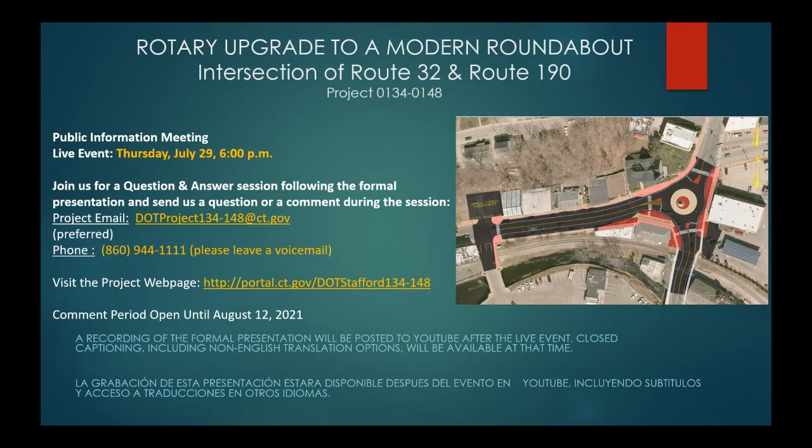Welcome to the virtual public informational meeting for state project number 134148. My name is Mike Cherpak and I serve as the design project manager for this proposal.

I hope everyone is staying healthy and staying safe. We appreciate your willingness and flexibility to attend this meeting in this venue. The goals of tonight's meeting are as follows.

First, I'll introduce you to the design team, including front office leadership and designers. Next, I'd like to go over the virtual platform and how you'll be able to interact with the design team, ask questions, and get answers.

The designers will provide a formal presentation that'll provide some background on the project location, define what the purpose and need of the project is, and go over the design plans. These plans are only about 30% complete, and your input at tonight's meeting will shape how this project progresses.

Lastly, we will have a live question and answer session. More on how this will work later. I mentioned earlier introducing the project team. We've been regularly communicating with the town of Stafford, including First Selectman Mary Mitta. So before we go any further, I'd like to allow First Selectman Mitta to say a few words.

Good evening, everyone, and thanks for attending this informational meeting regarding the modern roundabout being designed and constructed by the State of Connecticut Department of Transportation. This will be in front of the Warren Memorial Town Hall, which is at the intersection of Route 190 and Route 32, which is our main street.

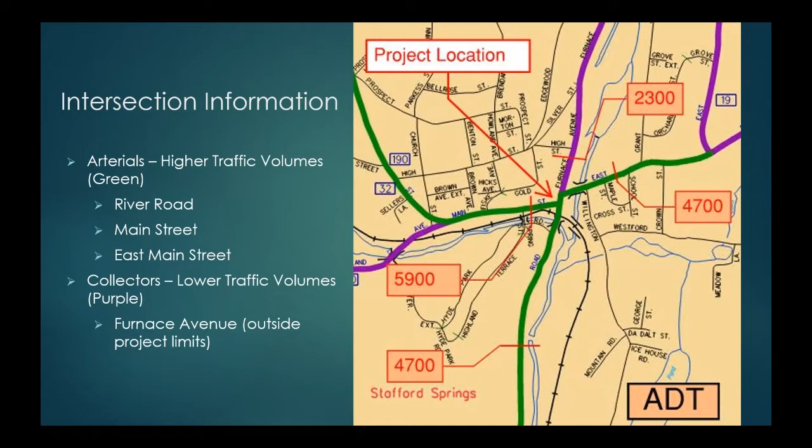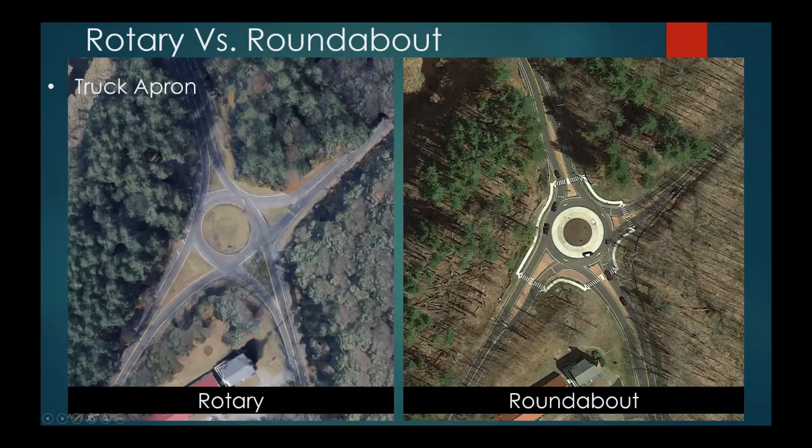Next, you probably noticed the pedestrian accommodations, including sidewalks, crosswalks, and refuge areas located within the splitter islands. Speaking of the splitter islands, their purpose is to provide channelization and traffic calming into the circulatory roadway.

The rotary configuration isn't doing much for the driver, but the raised splitter islands of the roundabout and 6-inch curbing provide the necessary geometry to channelize and decelerate vehicles on approach, setting up one of the most important factors: deflection. The fastest path through both intersections in most cases is the through movement.

The rotary configuration does not offer much in the way of deflection and is very much a straight shot through, allowing for dangerously high speeds. Should the south-north driver fail to yield to the west-east driver, a crash here could be fatal, and this was one of the main reasons for modernizing this rotary.

The modern roundabout, however, has reverse curves, which force drivers to decelerate and proceed through the intersection at a slower, more controlled speed. If we compare the two movements, we can see there are only 2 curves in the rotary, and 5 curves in the roundabout.

Additionally, drivers in the roundabout approach closer to the center of the circle, while in the rotary they approach more from the side, again allowing those high speeds.

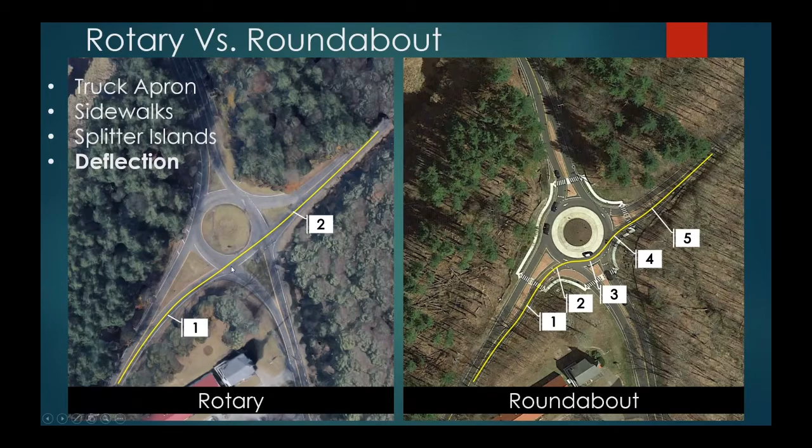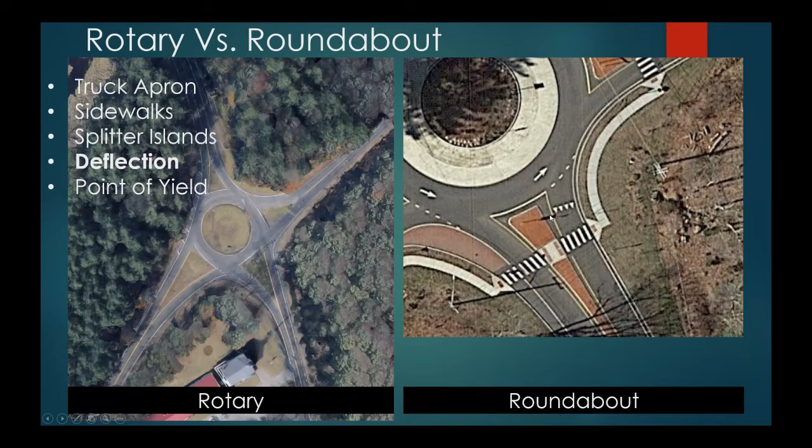Lastly, drivers on the approach legs of the roundabout yield to drivers in the circulatory roadway. The dashed lines illustrate the separation between the approach leg and the circulatory roadway. Though this is true in both intersections, the roundabout's point of yield is more apparent and further illustrates where vehicles are required to yield. From the driver's perspective, we can see how the yield signs are placed at the same point as the pavement markings.

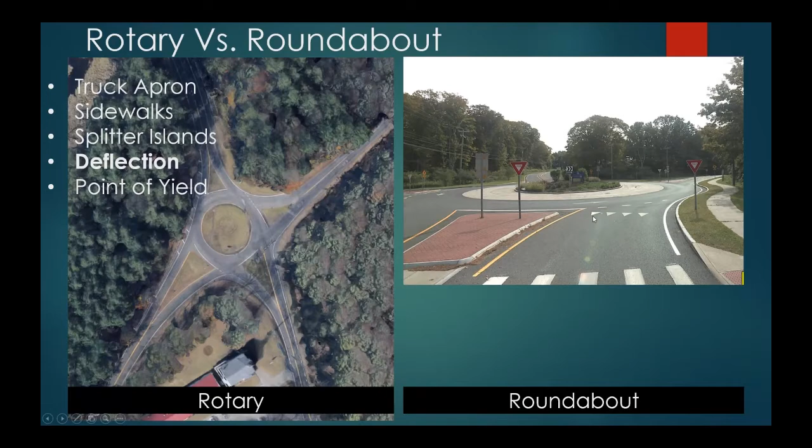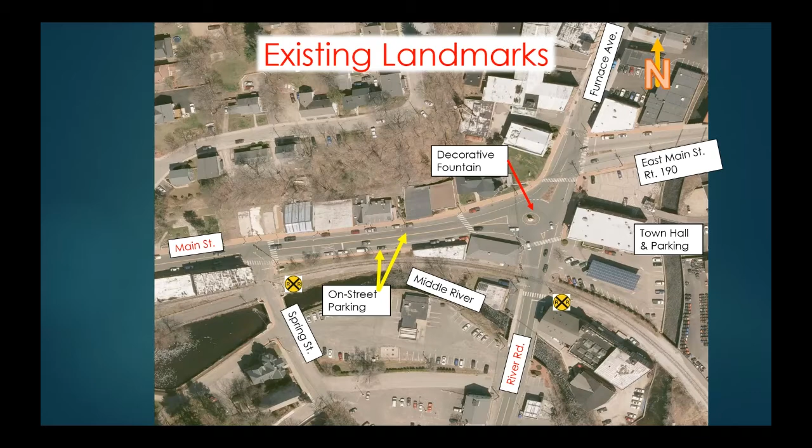Coming back to the Stafford roundabout, we'll look at the issues of this rotary configuration one leg at a time. However, we should keep in mind that the example we just looked at was in a high-speed rural environment, where our location is in a low-speed urban environment. Though the goals are the same, the treatments are different, as roundabout design is not a one-size-fits-all solution.

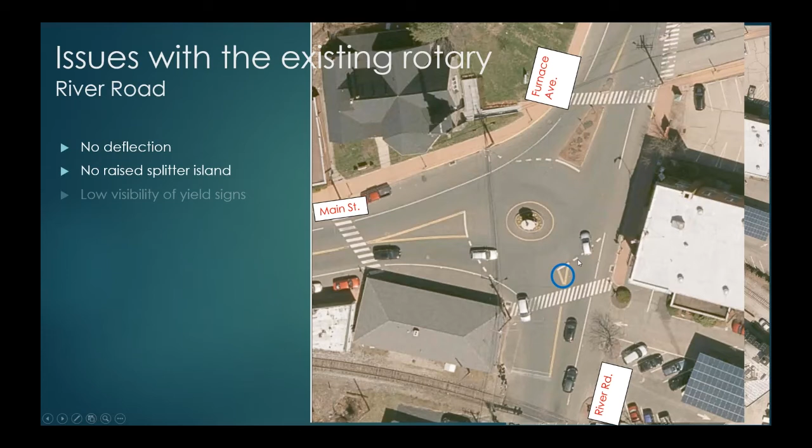Starting on River Road, we can immediately see that there is no deflection on this approach. It is very much a straight-through movement. Taking a closer look, there is no splitter island present to guide users into the circulatory roadway. The location of the white dashed line with respect to the location of the yield signs decreases the sign's visibility and effectiveness.

This creates driver confusion. A driver approaching on River Road may fail to yield due to the low visibility of the sign, or a driver already in the circulatory roadway may unexpectedly stop in the roundabout, assuming the entering driver will not yield, possibly causing a rear-end crash.

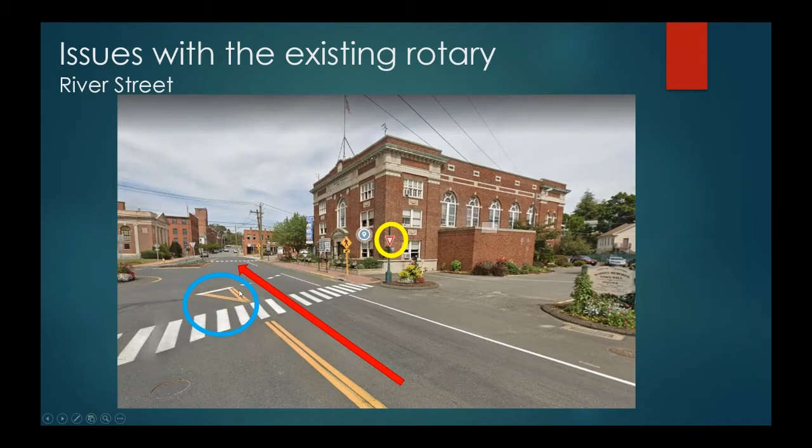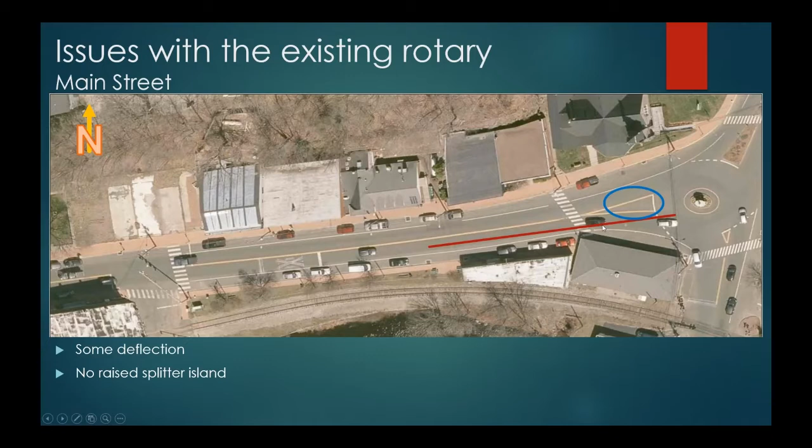On Main Street, we have some slight deflection. However, only a painted splitter island is present, and the location of the yield sign is in front of the police building, almost 50 feet from the actual point of yield. Lastly, the lack of channelization has created a conflict with the roof of the police building, and less experienced drivers of large commercial vehicles have actually struck the roof.

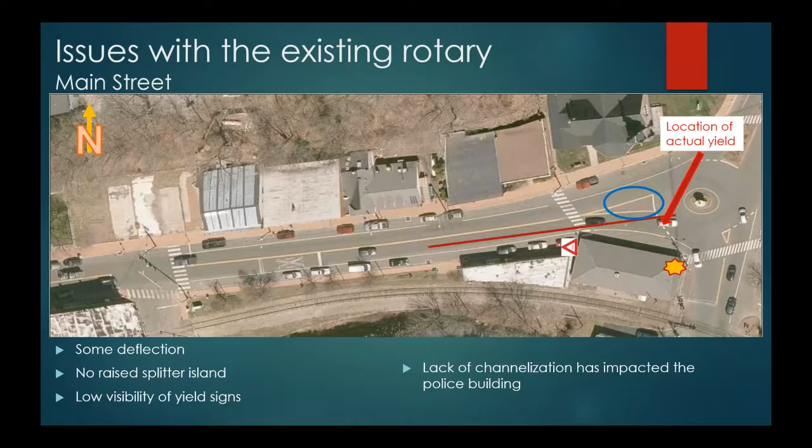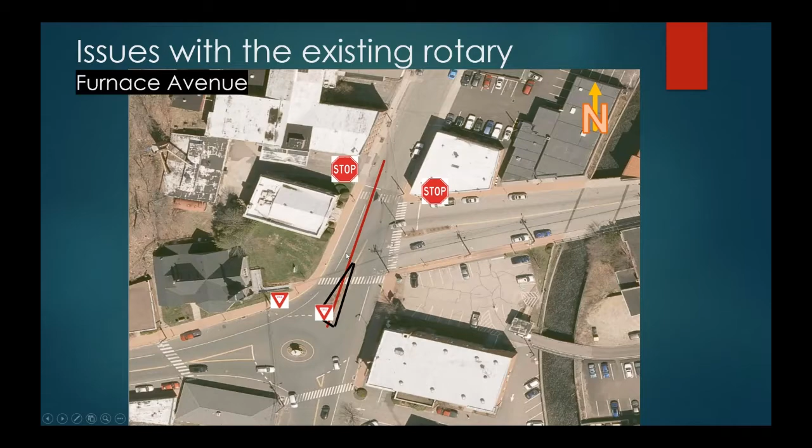Lastly, let's look at the approach from East Main Street and Furnace Avenue. This approach is better than the other two legs of the intersection. A small splitter island is present, yield signs are in the proper location, and the deflection isn't too bad either, but there's still room for improvement.

A look at the crash history in our project limits revealed that there were 30 crashes and 2 injuries which occurred over a 3-year period. 5 were angle crashes or T-bones, 10 side swipes, 14 rear ends, and 1 pedestrian was struck by a vehicle crossing Main Street.

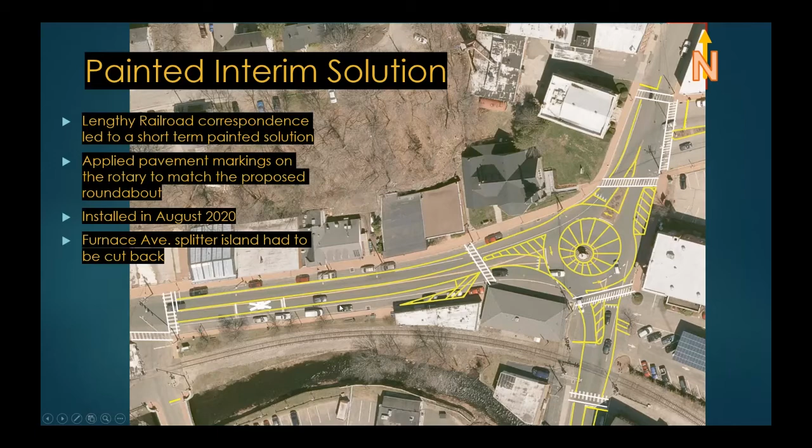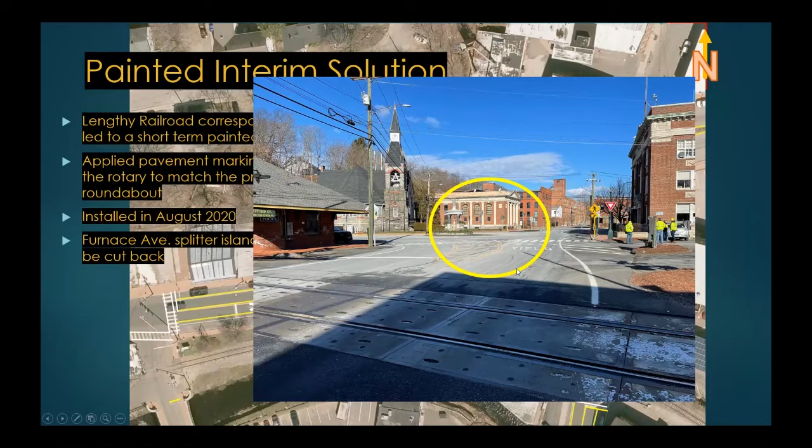I mentioned before that there were 2 rail crossings present in the project limits, and we will be upgrading the railroad warning devices at River Road with our project. However, since coordination with railroad entities is a lengthy process and our preliminary roadway design was nearly complete, the department saw the opportunity to provide line striping as an immediate temporary solution to the deficiencies of the rotary. This was installed in August of 2020, and it allowed us in design to see how well roundabout geometry would perform, or if there were any changes to consider for a more permanent solution.

In our initial assessments, the line striping performs well, but the issue of driver compliance with the line striping still remains. It's easy to drive over a painted line instead of a curb. Therefore, there's still need for a more permanent solution.

I will now turn the presentation over to the project's designer to discuss what we are proposing.

Thank you for the introduction, Nick. My name is Hasib Ahmed, and I am the project designer. I will take you through some of the changes that we are proposing.

With the combination of the horizontal curves, the splitter island, and the truck apron, we're able to slow vehicles down as they approach the roundabout. If you remember from existing conditions, it was a straight line from River Road to Furnace Avenue, but with this combination, it's not as much of a straight line anymore.

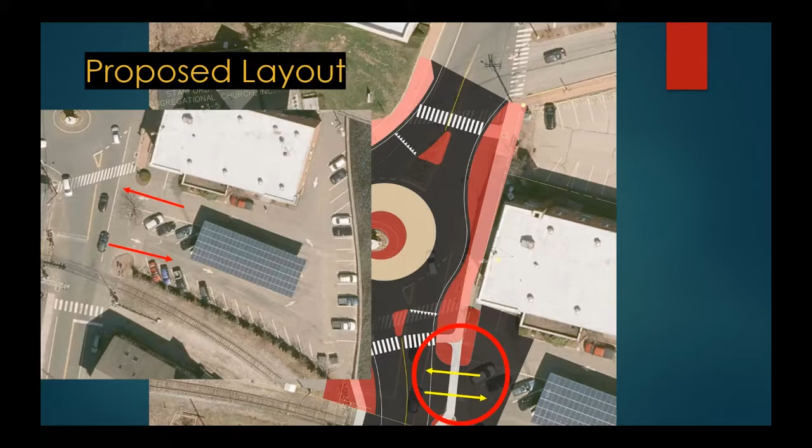Some additional changes include adding a channelization island in front of the police building. This helps in four ways. First, it enforces the horizontal curve on Main Street and helps people slow down as they approach the roundabout. Second, it gives police a parking area in front of the building. A portion of the island will be mountable to allow police vehicles to exit without waiting in a queue.

Third, the island gives us a proper location to install a yield sign. Previously, the yield sign was located much further back, but now with the island, it can be placed near the yield point. Finally, the island pushes vehicles and trucks away from the police building, which should prevent the roof from getting hit by trucks.

We are also proposing to install a parking lot at this location. We are proposing to extend a few curb lines to help improve the geometry of the roundabout. The parking lot is being installed to help mitigate parking loss, with approximately 11 parking spots fitting in this location.

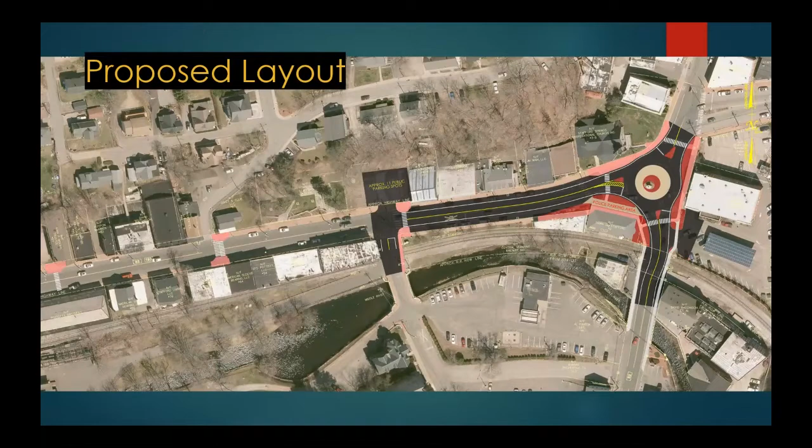This is a larger color plan that shows some more changes. We will be adding bump outs on Main Street, which I'll go over in greater detail shortly. We are extending the curb line at these locations, which enforces the geometry of the roundabout and pushes vehicles away from pedestrians, also giving pedestrians more room to walk around.

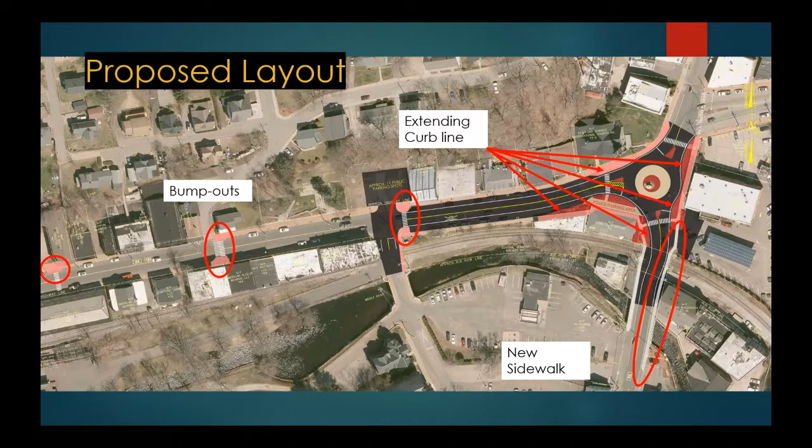Lastly, we are connecting the sidewalk from the town hall to the gas station just south of the bridge. We will be retrofitting the existing bridge with new sidewalk.

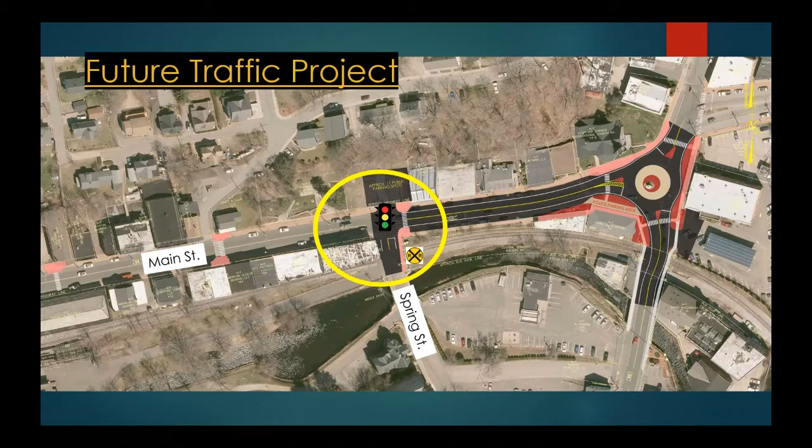I wanted to mention there is a separate project in design to upgrade the railroad crossing equipment at Spring Street. They are also looking at replacing the existing flashing beacon with a full signal as an alternative. This full signal alternative has been analyzed and will not have any impact on the roundabout operations. The state will coordinate with the town as this separate project moves through the design phase.

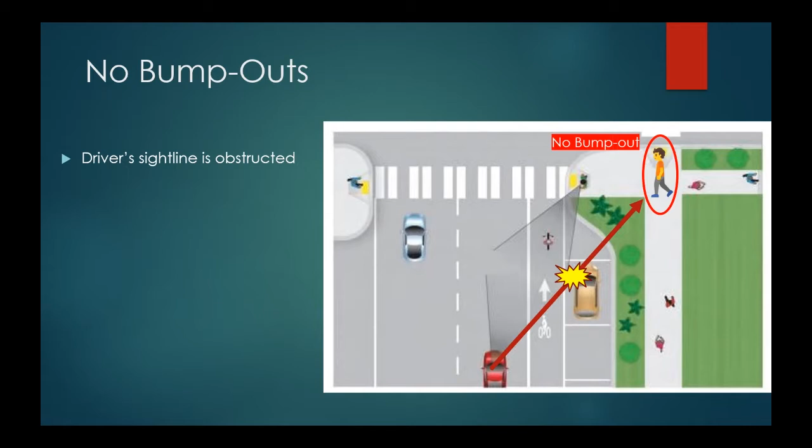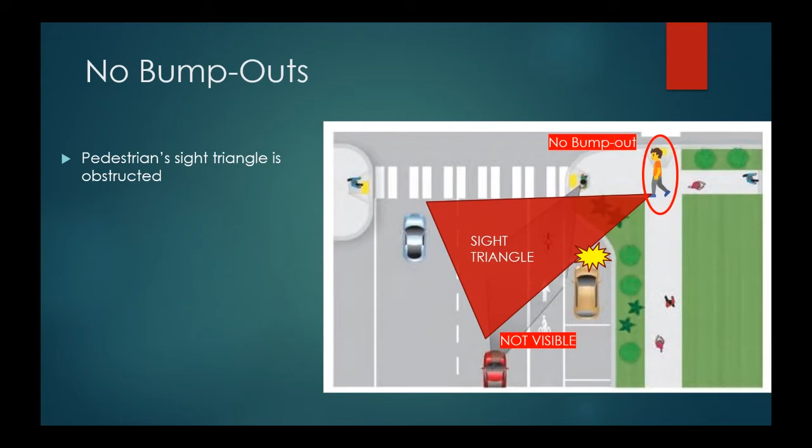The pedestrian will also have a difficult time seeing oncoming cars because the pedestrian sight triangle is obstructed by the parked cars. It is very difficult to see behind the cars at that angle. Without bump outs, the pedestrian would have a longer crossing distance, which also means the driver would have a longer wait time.

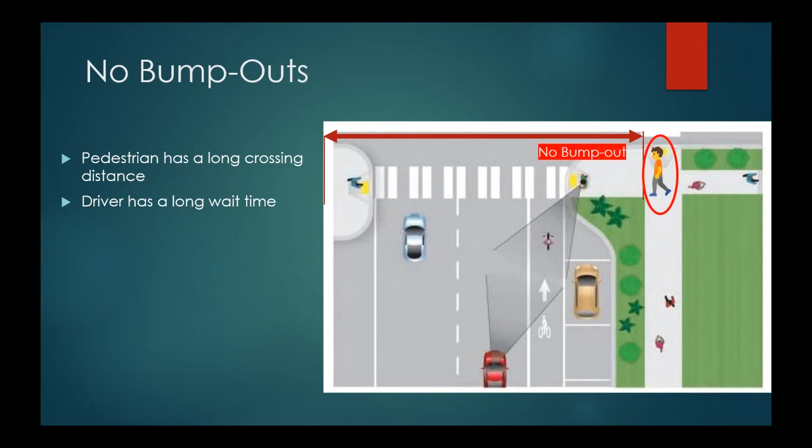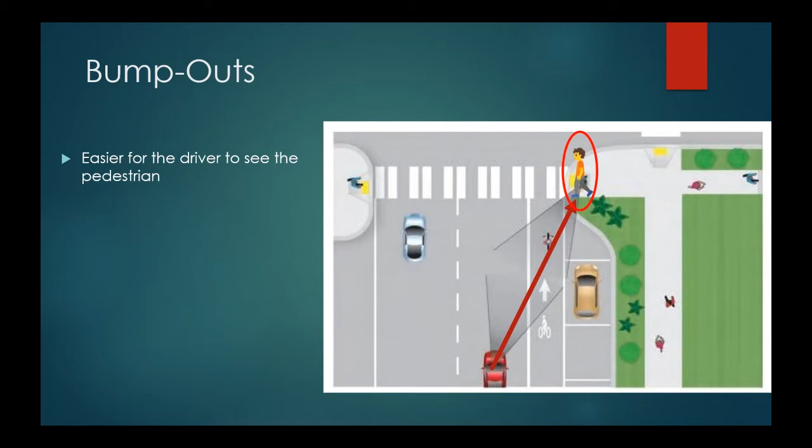Once bump outs are installed, the pedestrian is much closer to the travel lane, making it easier for drivers to see pedestrians since parked cars no longer obstruct the view. It is also much easier for the pedestrian to see the roadway, and this increase in roadway visibility makes the pedestrian feel more safe.

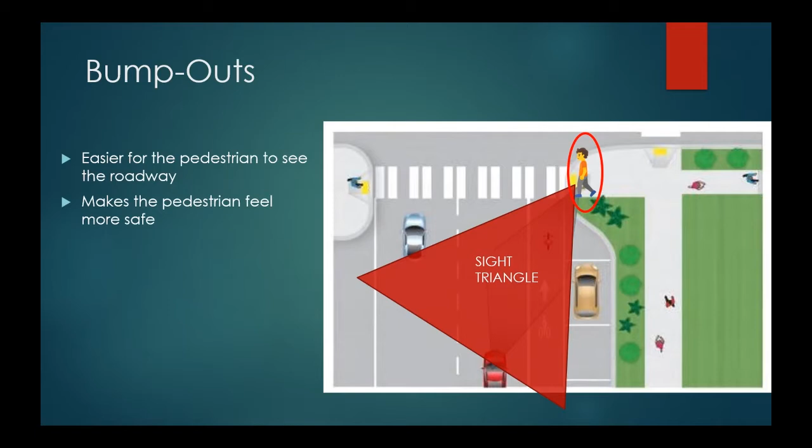With the installation of the bump outs, the crossing distance becomes shorter. This also helps the driver because now there is a shorter waiting time.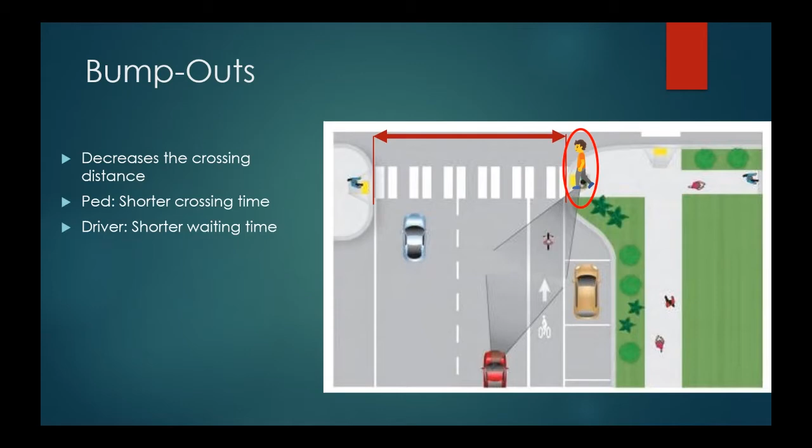Now I'll talk about the typical sections used for this project. First, let me explain what a typical section is: it's when we take a slice out of the roadway structure and examine it as if we were standing in front of the slice. These sections help us design roadway elements such as shoulders, travel lanes, and curbing, and also help us see where the stormwater is draining.

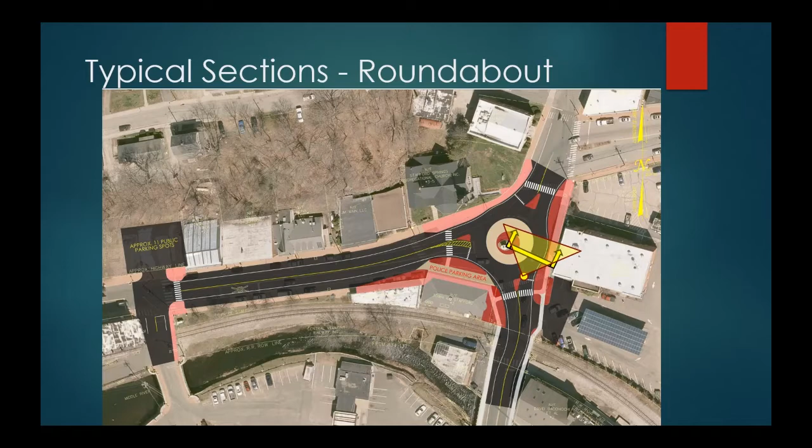The first section we will look at is the typical section for the roundabout. We will be taking a slice out of the roundabout where the yellow line is, viewing it as if we were looking north. Here you can see the typical section for the roundabout: we are proposing a 12 to 18 foot truck apron, followed by an 18-foot travel lane and a 2-foot shoulder.

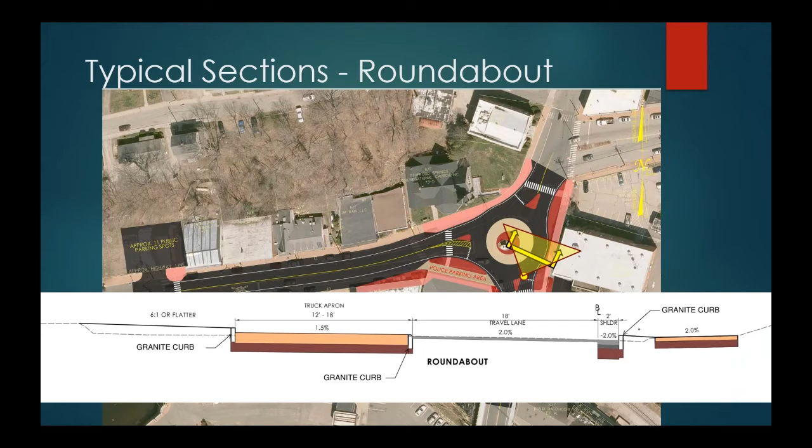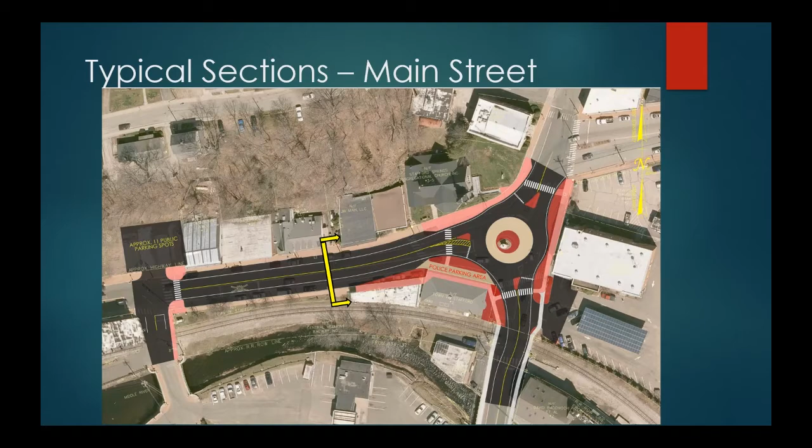For Main Street, we will be slicing the roadway here, looking as if we were looking east. The typical section for Main Street has 9 feet of on-street parking, followed by two 12-foot travel lanes, and 10 feet of on-street parking on the right side.

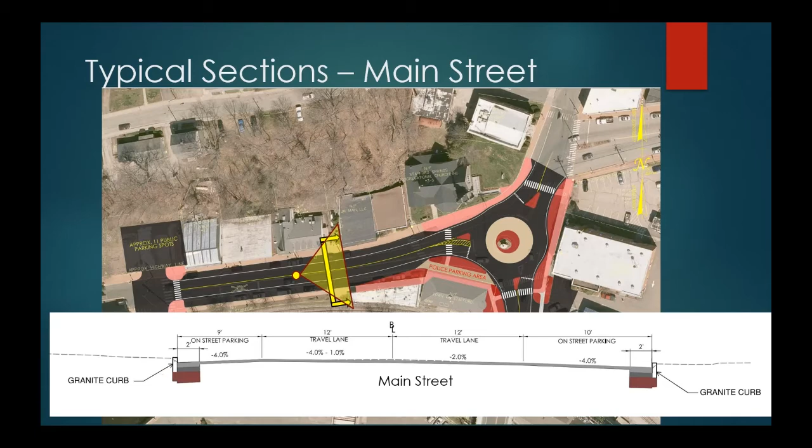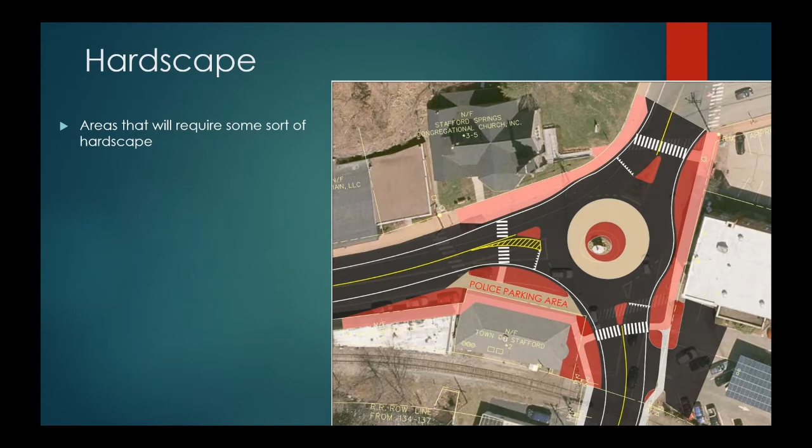As mentioned previously, we will be extending the curb line to create a better geometry for the roundabout. These are the areas that will require some sort of hardscape. We are proposing to use stamped concrete, and the new stamped concrete should match the pattern and color used in the existing hardscaped areas.

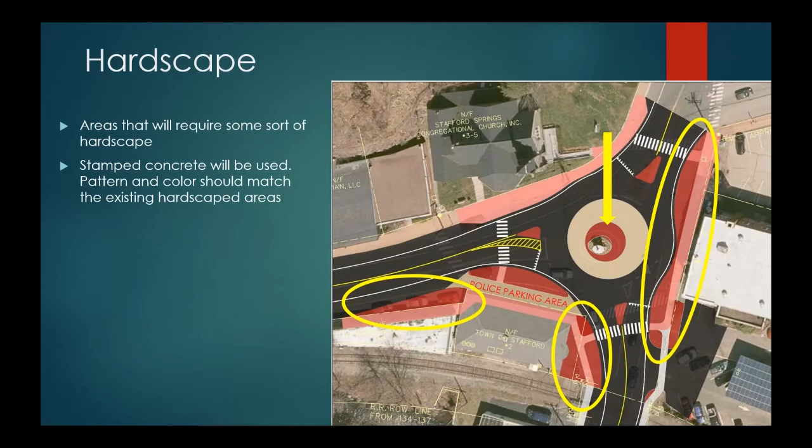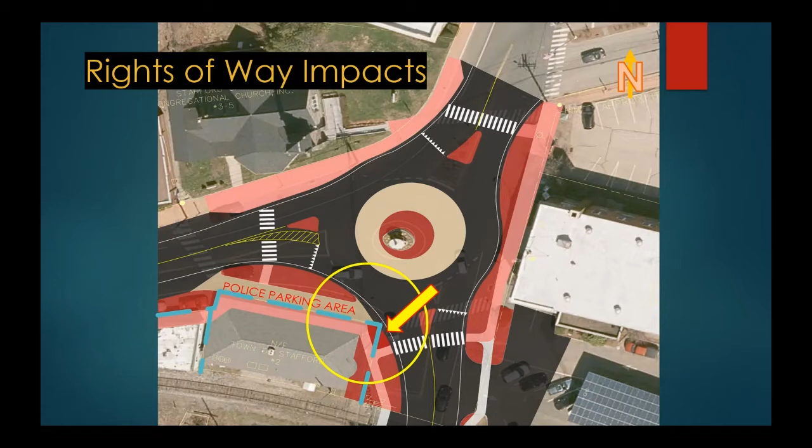Rights-of-way coordination will continue for this project, and we are still evaluating the rights-of-way impacts. This is an example of one minor impact. Here we have the property line for the police station highlighted as the blue dashed line, and you can see a small portion of the curbing is crossing over the property line. Much of the project is being built within the existing footprint of the intersection, so we do not expect any significant acquisitions.

Dennis McDonald is here from our rights-of-way office, and he will explain the rights-of-way process.

Good evening, everyone. My name is Dennis McDonald, and I'm a representative from the Connecticut Department of Transportation, Division of Rights-of-Way. I'll provide a brief overview of the right-of-way process. The function of the Division of Rights-of-Way is to acquire all property and property rights necessary for the project. This is done in accordance with Connecticut General Statute Section 13A-73, 13a-98e, and the Uniform Relocation Assistance and Real Property Acquisition Policies Act of 1970, as amended.

Your typical right-of-way impacts include partial acquisitions, easements, and rights. Impacts are subject to change as the design progresses, but this gives a general idea of typical property impacts.

Once property impacts have been established, each impacted property owner will receive a letter of intent to acquire along with a property acquisition map. The letter essentially initiates the right-of-way process, and the map provides a detailed overview of the specific right-of-way impacts. Soon after the letter is received, an evaluation process will take place, and once a value has been established, each impacted property owner will receive a written offer of compensation.

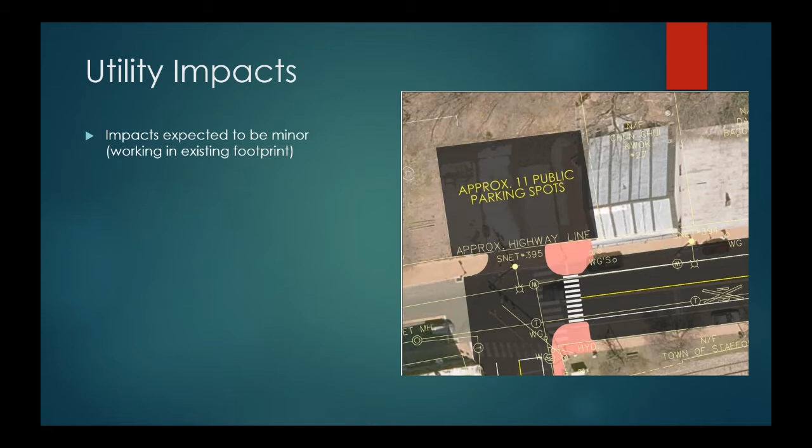Thank you, Dennis. Next, I'll talk about some of the utility impacts. As mentioned earlier, we are working within the existing footprint, so we expect the utility impacts to be minor. One example of a minor utility impact is a utility pole in the proposed parking lot driveway. If the utilities cannot be avoided, they will have to be relocated. We are coordinating with our utilities office to see how to best manage these conflicts.

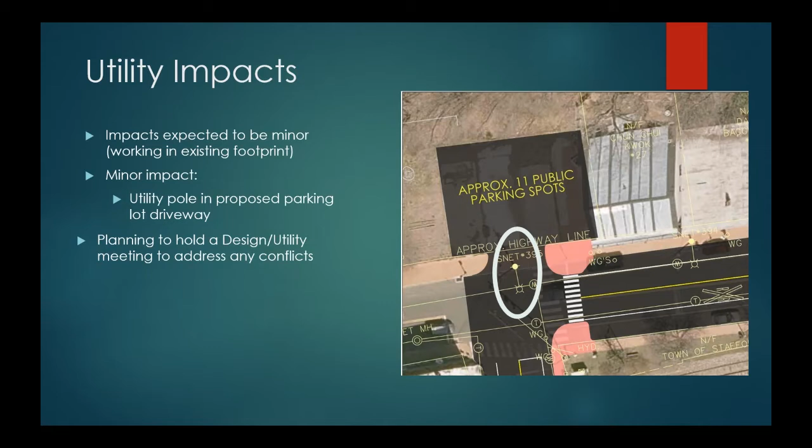Now I'll take a few seconds and talk about the project construction. We anticipate that construction will start in the spring of 2023 and be completed by the fall of the same year. The contractor will be required to maintain and protect traffic during construction, and to provide business and pedestrian access. Occasional night work may be required to reconstruct the roadway. We do not expect any roadway closures; the intersection should be operational throughout construction.

The construction staging plans will be completed in the final design phase of the project.

That is the end of my presentation. I'll turn it back over to Mike. Thank you for your time.

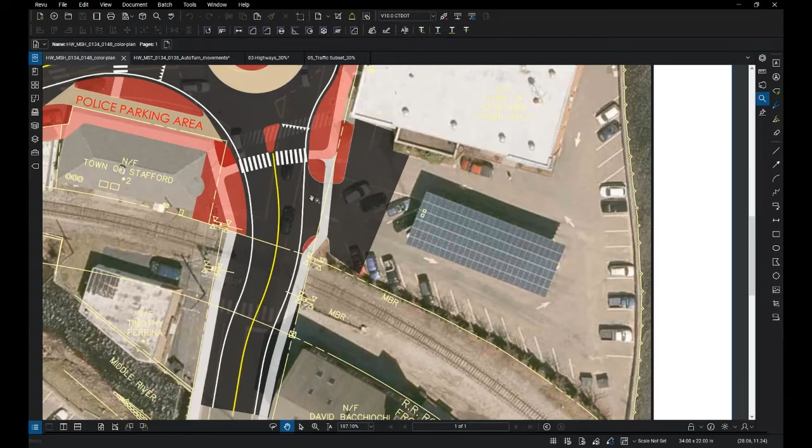In terms of circulating around the town hall's parking lot, it's going to be the same as it is today. A couple of parking spots in this area will be affected. You would still make a right or left turn into this parking area, circulate in the same direction as these arrows, and come back out the same way you came in. The only difference is that the island that was present before is now occupied by this space, where we're moving the driveway entrance to make room for the crosswalk at this location.

One of the things we needed to do is provide an area far enough away from that circulatory roadway where we could cross pedestrians. There's a lot of pedestrian activity out here, with people going to the town hall, the police station, and the shops up and down Main Street. So pedestrian crossing and activity was one of our major points of interest for the design team. Thanks, Nick, for bringing it up.

There's another question: is it possible to find parking off Main Street? I fear that paving the vacant lot for a parking lot misses a great opportunity to create more climate-friendly green space downtown that would attract people.

That's a great question. One of the things we talked about with the town, and something the town explicitly brought up, was the loss of parking being a major problem. Our showing of the 11 public parking spots that could be created by that lot was really just an idea to mitigate against that loss.

We knew we needed to adjust curb lines and take parking out of the circulatory roadway and the roundabout, because it's just not operationally good, and we'd be losing spaces in those areas. So we looked at that vacant town-owned lot as a potential mitigation for it. That doesn't mean we have to do that — there could be other ways to go about this.

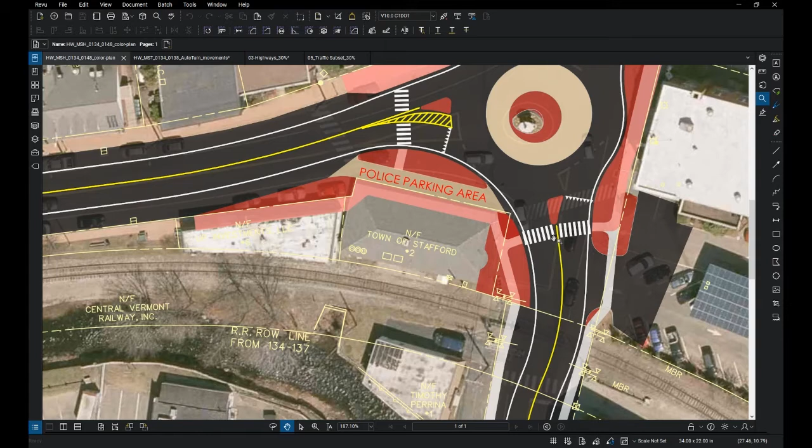We're going to extend the sidewalk down a little further, closer to where the parking lot is, and we're going to put the crosswalk across River Road here, locating it at the best position for the roundabout and moving it prior to the yield point for drivers. But the sidewalk in this location will be replaced in kind, and pedestrians will still have this space to move around. Thank you for your question.

And Nick, while we're on that conversation, what can you show us as you move south down Route 32, that sidewalk there, it was kind of hard to see in the presentation. Can you just show people where we're extending sidewalk and where we have existing sidewalk out there?

Yep. So the sidewalk didn't exist on this side of the bridge currently. There was a request from the town that if we could retrofit the bridge with the sidewalk, and we coordinated with our bridge engineers. We found that the bridge itself was structurally able to support a sidewalk at this location. There are some locations where there'll be a raised sidewalk on top of some 6-inch curbing. This would be closer to the bridge. And there's other areas where the sidewalk would almost be flush with the pavement, and that's to accommodate some of the driveways that are in this area.

There was a desire to bring it all the way down towards the gas station or former gas station at this location, so this is where we brought it to. The other sidewalk on the opposite side of the road looked like it was in somewhat rough condition, so we were upgrading this as well and resurfacing it.

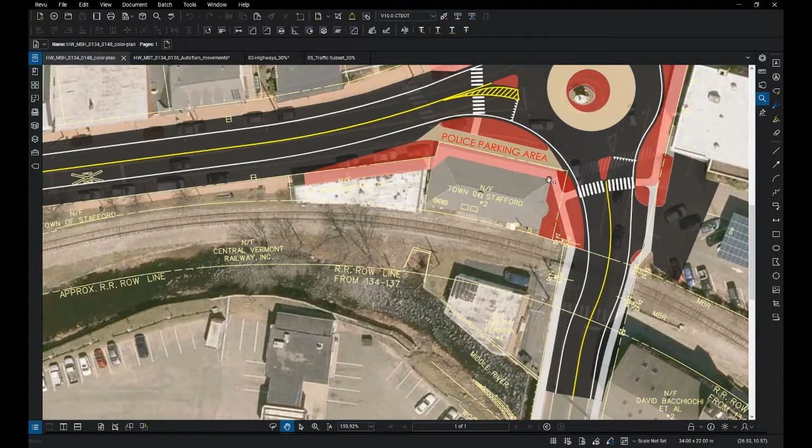Yep, that's right, Nick. And we'll be providing connections to these sidewalks on both sides, in front of the police station and around, similar to how they are today.

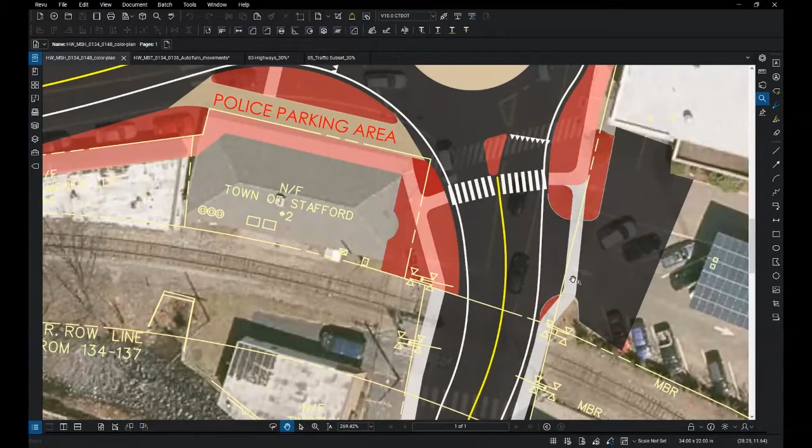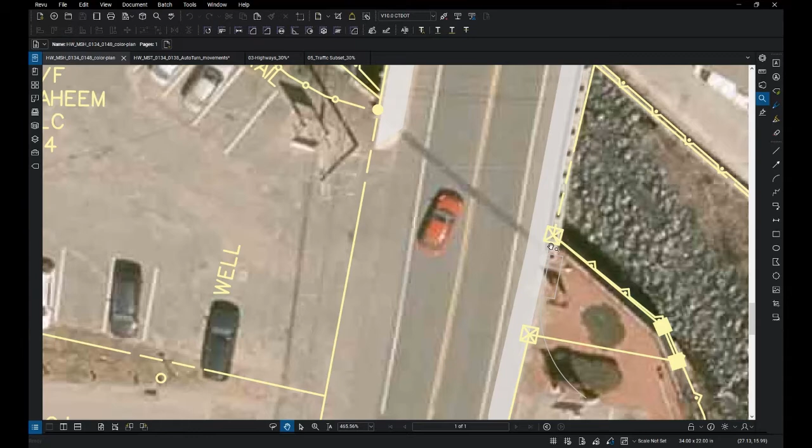So Nick, there's a question about how many property owners will potentially be affected by right-of-way acquisitions for this project. Not many, right? No, our rights-of-way involvement on this project is very minimal. The only potential acquisitions would be a small sliver that's needed to accommodate the curb line at this location. We're working with the town on that. There's some locations over here where the sidewalk crosses over the right-of-way line. We're coordinating with the town, and possibly an easement to put an impact attenuator or some type of railing device in front of this area, just to protect the bridge abutment. These are still details that we're working out.

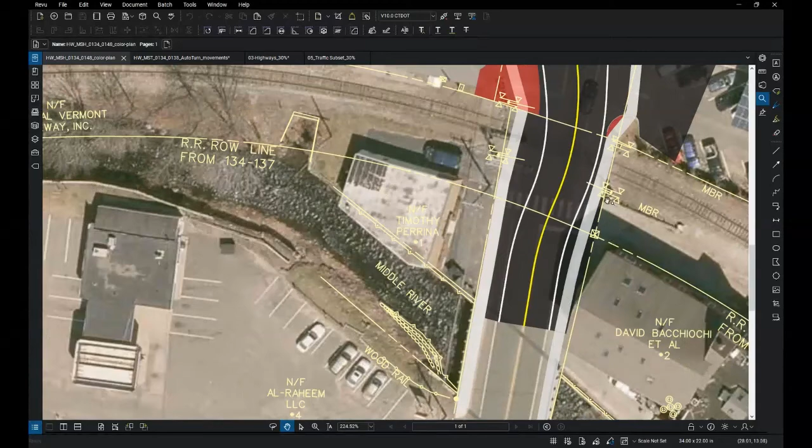But in terms of all other properties in this area, sidewalk amendments would most likely be done as rights, and we would coordinate with those property owners, but there wouldn't be any easements for this work.

Nick, you still there? No, we may have lost Nick. Okay, so like Nick was saying, I do not believe there's very many, if any, rights-of-way impacts. So hang on while we address some technical difficulties.

Okay, so there's a question about why do we need new sidewalk from City Hall to the gas station? The gas station's been closed for 2 years. What we'd like to do is provide sidewalk connections the best that we can. That property could be developed at another time. And so under our project, we feel we can provide those sidewalk connections at a relatively low cost. It's probably the best time to do it now. So we're going to do that.

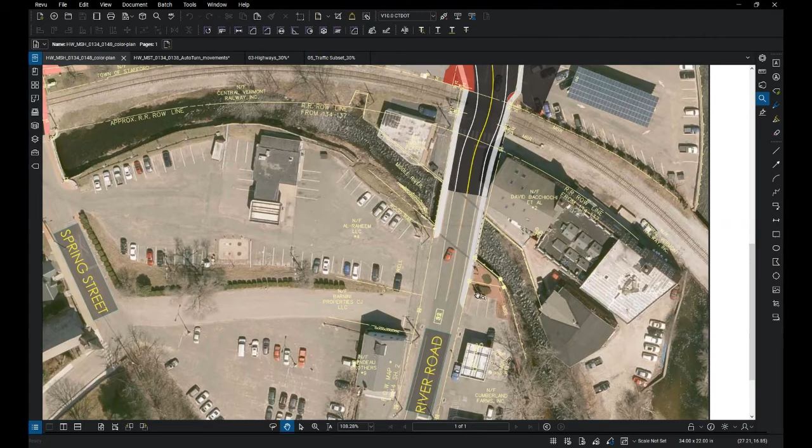There's a question that says, you mentioned an analysis of a full traffic light that you wish to install. You say it will not adversely affect the flow of traffic through the rotary. Could you please discuss this? Yep. So with us today we have Mike Chachakis. He's one of the traffic engineers responsible for looking at that. What it comes down to is it's a project that would potentially replace the existing traffic rail crossing equipment, which he'll tell you is out of date and in dire need of an upgrade. One of the options they're looking at is a full actuated signal, and that signal would be under a separate project. We wanted to make sure the roundabout would work with either the existing signal equipment or any proposed signal equipment, and Mike will tell you it does work with both scenarios.

And Mike, are you able to unmute and talk? Hey Mike. Yeah, I can talk for a little bit about the potential signal we may be putting in there separately. So if we do the signal, we don't want it to affect the roundabout, obviously, because backups into the roundabout can lock it up pretty quickly.

So looking at that signal, we looked at future volumes. We went out to 2040 projected volumes to see what would happen. Because it's a fully actuated signal, it'll rest in green on Main Street until someone from Spring Street, or from a parking lot there, calls in their phase and changes the signal on Main Street to red to give themselves the green light. We wanted to make sure that when that happens, there wouldn't be any kind of backups into the roundabout. So from what we've found, our 95th percentile queues show that it won't affect the roundabout.

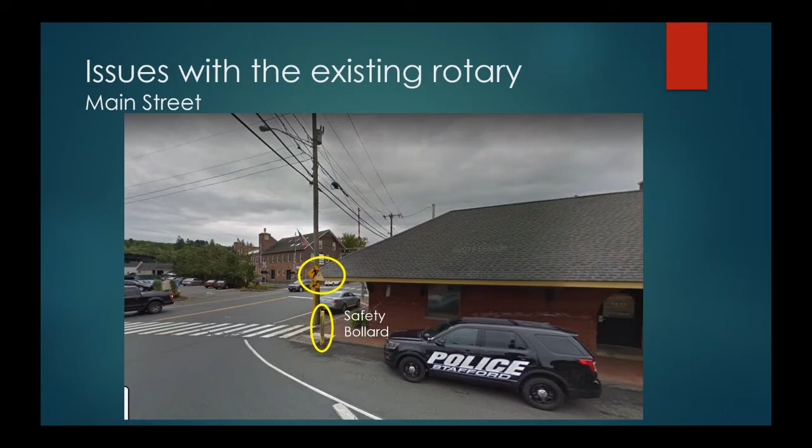There's a question here, and I think we just need to close the loop again. The bump-outs would require town snow removal, consistent with the existing patterns out there now. The town removes snow from the parking areas and the sidewalks, and the town indicated they would continue to do that after a snowstorm.

Mandy asks, will there be a garden area that surrounds the fountain, or will that all be concrete truck apron? Let's bring up the plan again.

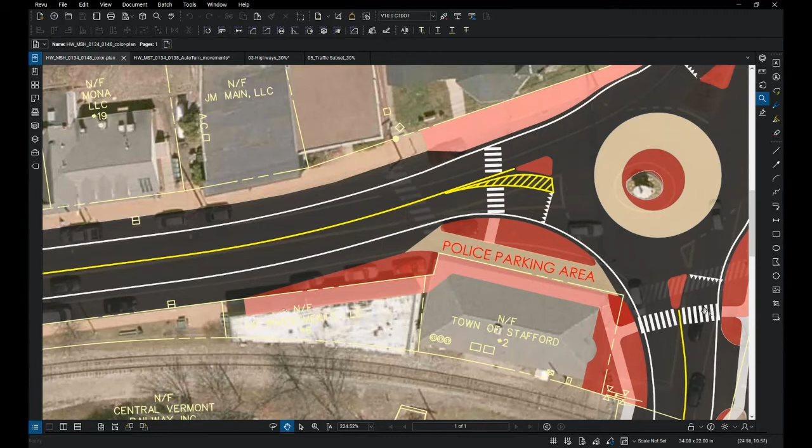We have a phone call, a voicemail from a business owner concerned about right-of-way conflicts and how it will affect parking where it's already restricted. Right now, the only right-of-way acquisition we believe we have is to clean up - I wouldn't even call it a right-of-way acquisition. It's more cleaning up a deficiency where we have roadway pavement on Town of Stafford property, so it's more of a technicality. Everywhere else in the project limits, we don't believe there's much right-of-way involvement. We may ask property owners for a right to construct or reconstruct a sidewalk on their property, but that's just to clean things up and make sure the whole community looks like a complete project when everyone's done.

Will it affect your parking? I'd have to know exactly where your business and parking are. But I'd urge you, if you left your contact information in the voicemail, myself or someone from my team can get back to you, and we can even meet you in the field to explain where curb lines are going to be pushed out. For the most part, between Spring Street and the roundabout, the parking situation will remain the same, with the exception of immediately in front of the church and immediately in front of the town hall. I'm not even certain those are legal parking spaces in front of the town hall. But those are areas where the curb lines have been adjusted, in the immediate area of the roundabout. Everywhere else, they're almost in the exact same location, if not the same.

There was a question asking, have you spent time watching actual traffic, especially truck traffic passing through this area? Absolutely - I live in Somers, I go through this area quite a bit, and I spend a lot of time out there watching trucks. One purpose of putting the striping out there was to ensure we could get trucks through. My team went to Levesque Trucking up in Monson - they often head through this area with very large equipment. They measured their vehicles, brought the measurements back, and ran a simulation using the low boys Levesque uses, to make sure they could make it, because this is a very tight roundabout. Let's be honest here - we wanted to make sure we can get trucks through in all directions, and we believe that we have.

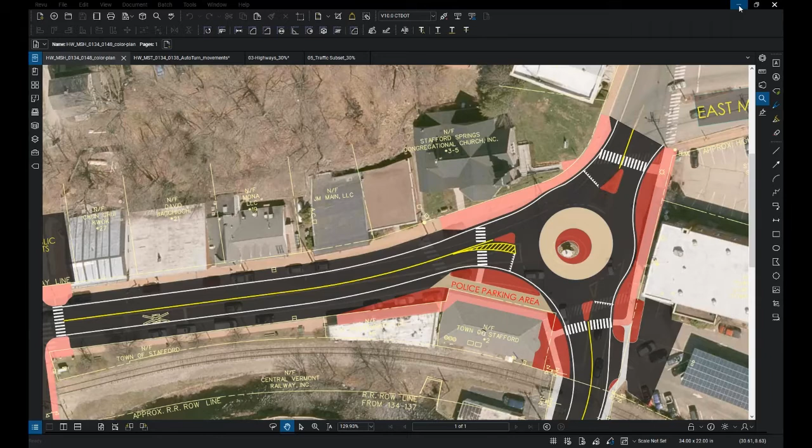With this configuration, using the truck apron and the new geometry, we believe those trucks, including the big trucks from Levesque and the other trucking industries out here, should be able to make it through without too much trouble. The striping that's out there now has really kind of solidified our belief in that.

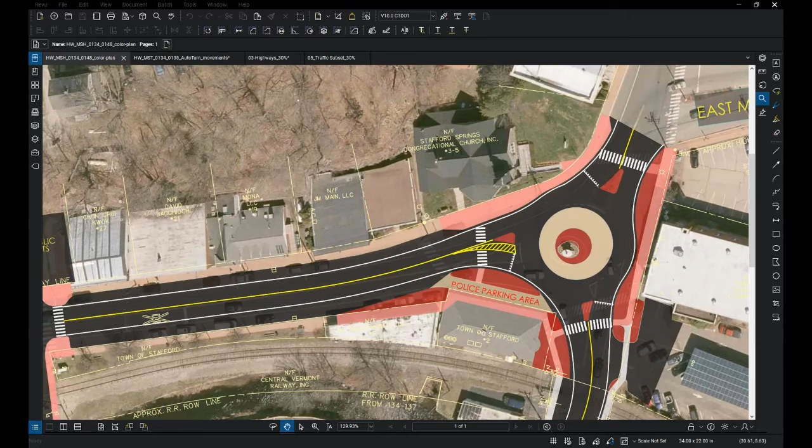So going along with my last point, the next question says tractor trailer trucks traveling on East Main Street have had difficulties, in one case knocked down the flagpole at the end of the current island. They've seen trucks going eastward on East Main Street having difficulties too. So it's just like the last question.

We believe that we've modeled trucks coming through here, both on the computer and in real life with the new striping pattern out there, and coordinated with the trucking industry that uses this area on a daily basis. We have high confidence that the trucks will be able to get through here even better than they do now.

How will the sight lines for the left-hand turn coming from Furnace Avenue be impacted by the project? I don't believe they're impacted.

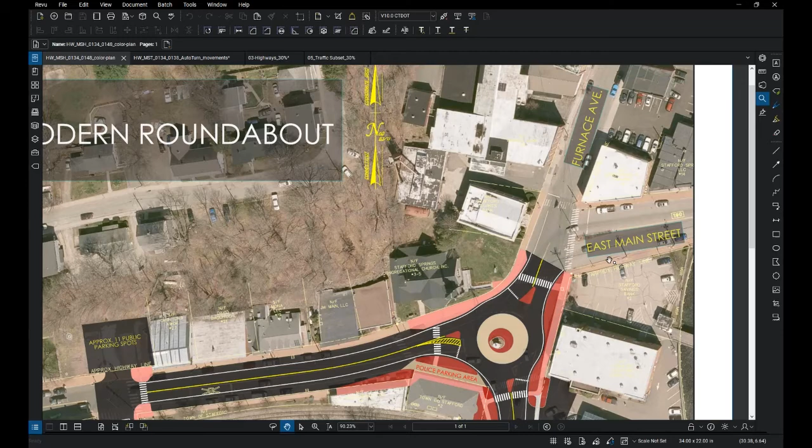Nick, are you back on here? Yep, still here. Can you comment on this at all? Left turns from Furnace Avenue - I'm assuming you mean Furnace Avenue onto East Main Street. I don't think they'll be affected at all, it's kind of beyond the limits of our project. If you mean from Furnace through the roundabout, I still don't think they'll be affected either. Most of the construction we're doing through this area, there's no real vertical elements that we're moving or changing, with the exception of curb line.

Yeah, that's what I thought too, Nick. I just wanted to make sure I understood the question right. Yes, Nick's absolutely right, I don't believe the sightlines would be impacted.

So one question says the truck apron in the proposed layout you're showing does not seem to be the same shape as what you have painted on the pavement. The yellow striping seems more parabolic than the round concrete truck apron shown on the layout. Nick, is that true? Is our layout in the field just a little bit different? I believe it might be.

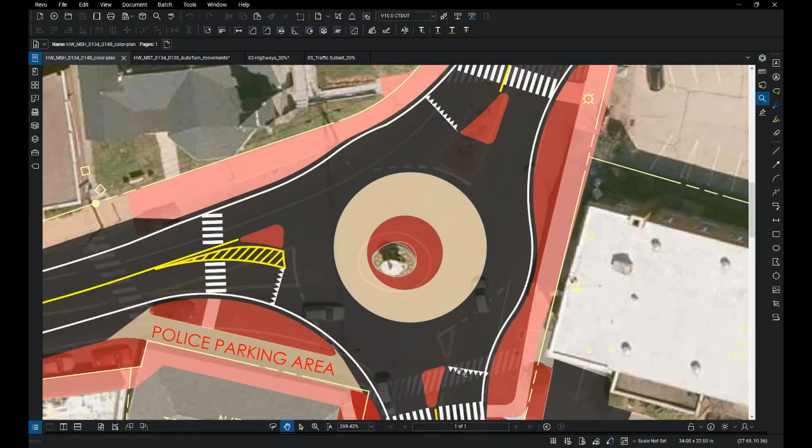I believe what we sent over was essentially the same as what we had modeled for this. Maybe it looks a little different in this presentation because you can't quite see where the shoulder line on the circulatory roadway is going to be - that's about 2 feet off from where the concrete part starts, so that might look a little different. It is sort of parabolic in that it's a little off center, and our truck apron does vary from about 12 feet in this area up to 18 just to allow that left turn movement from River Road onto Main Street. So that's why it's in that shape, but it should be pretty close to what we're showing on the screen today.

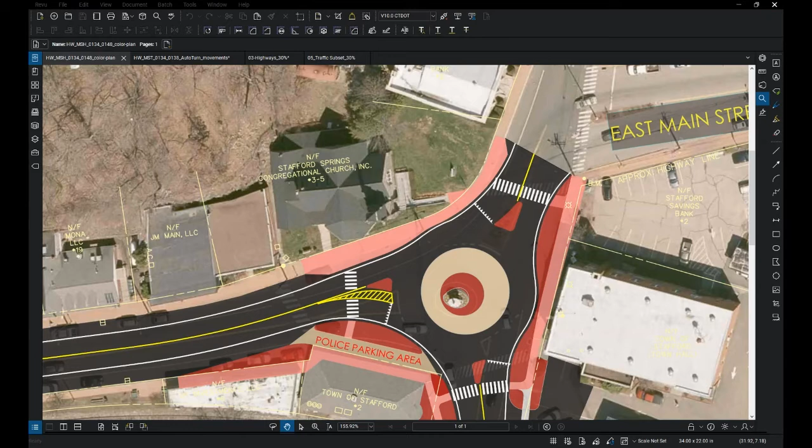So there's a question that says, how will traffic be kept from using the Christopher Allen Bridge on Spring Street, since the bridge is historic and is now in need of repair? Added traffic over that bridge is a cause for concern because of possibility of increased deterioration.

It's a good question. I don't think there's anything that's stopping them from doing that today. And I believe that that's a private road headed towards that bridge. You zoom out a little bit, right? And I don't think there's anything stopping people from doing that today.

Mike, is there anything that you guys do in traffic design to limit people? Is there anything that we would want to do if there was an issue with the bridge? I'm assuming the town, this would be a town bridge, would post it. We could look into it and see if there's something we could do, but being that that's part of the roadway network, outside of restricting traffic entirely, people are going to go where they're going to go. But we could maybe think of something, maybe a separate signing to try to encourage people to stay on River Road and Main Street. We'll see if it's something we could do.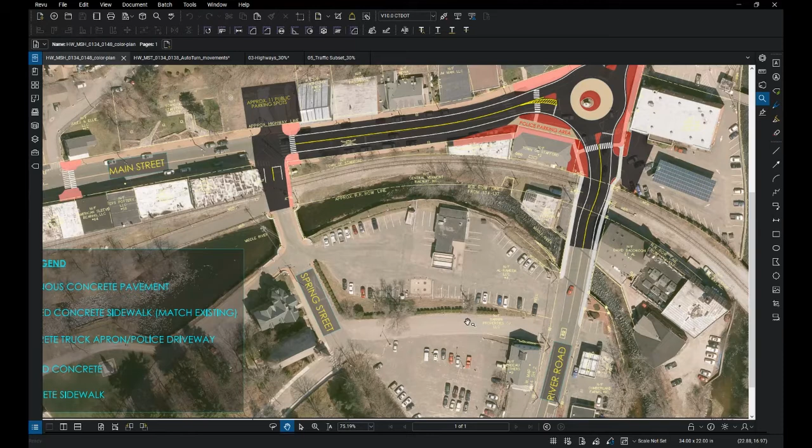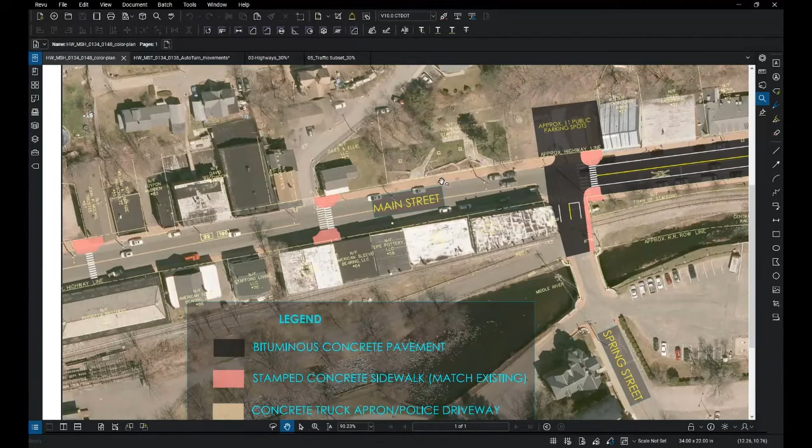Donna writes, are the bump outs completely hardscape or are they filled with soil or stamped concrete to match the sidewalks or paved? So right now, Donna, the sidewalks are expected to be paved. There'd be stamped concrete, the same material as the sidewalk, and so it's anticipated to be an extension of the sidewalk with an ADA compliant pedestrian ramp.

Right now we have no provisions to make them with soil. Like I mentioned before, those final details we can discuss with the town to do something different in those areas. I encourage anyone to talk to the town if they have comments or desires for what these areas should look like. These final details will be worked out with town staff, and the town would have to sign off on an agreement to maintain whatever treatment we have for these areas, whether they're sidewalk areas, stamped concrete, or if it's determined to have them planted, the town would have to sign off on the maintenance of whatever it is.

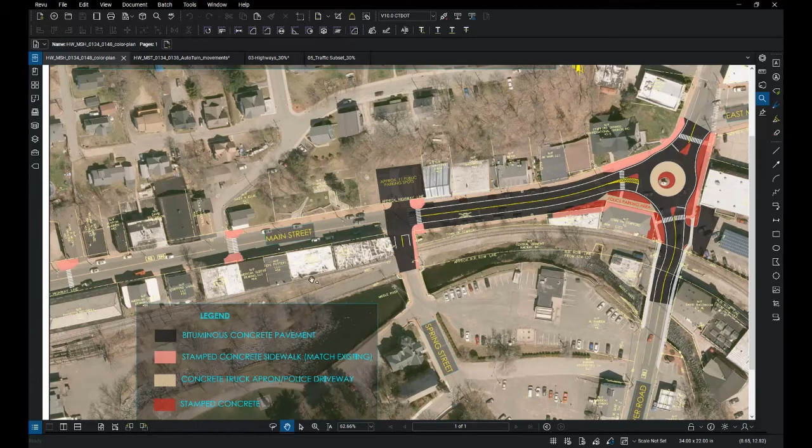We had an email question that says, could no parking signs clearly demarcated serve the same purpose as bump outs to provide sufficient visibility of pedestrians standing in the crosswalk without the added concerns of special snow management?

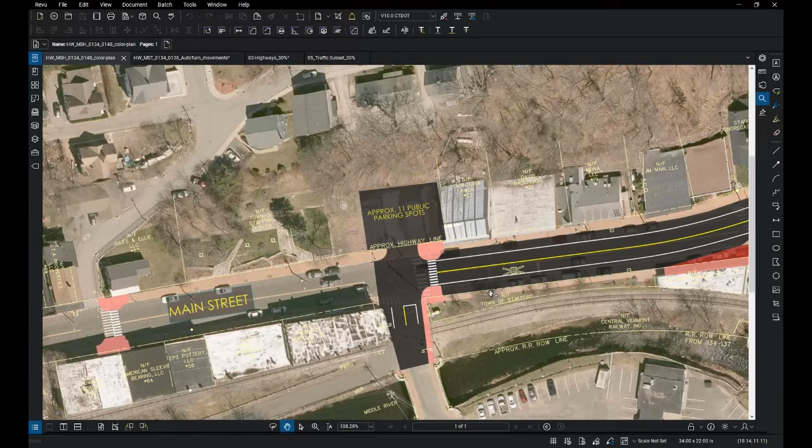So it could get some of the benefits, but you're not going to be able to get all the benefits. As Steve showed in his presentation, you're going to have a longer cross time. Your crossing time is calculated from the curb line, and if you're just using paint, you're not going to get that short crossing benefit of the bump out. Also, you're not going to get the benefit of having a raised up area, of having a pedestrian stand on top of a curb and sidewalk that's not in the paved roadway. That pedestrian is going to feel a lot more comfortable standing on that bump out than standing in the road with some striping protecting them.

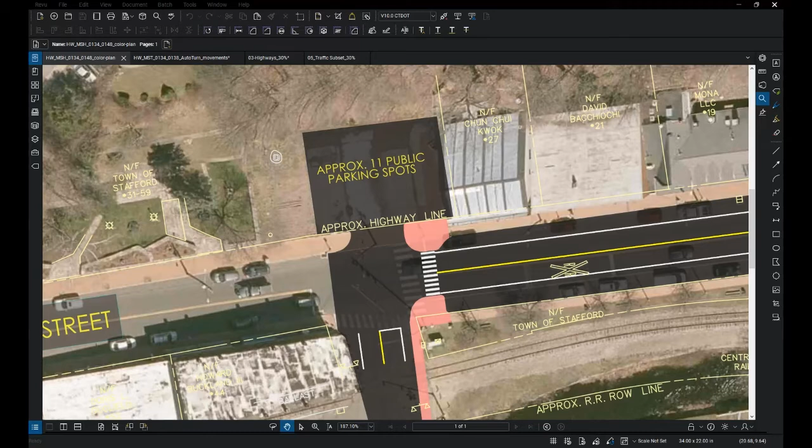So that's really the benefit of the bump outs, as Steve mentioned. The snow management thing, you're absolutely right, it's easier for snow management if that's flushed. Whoever's maintaining it can just plow it along, but you're not going to get the same benefit as you would with the raised bump out.

Joan mentions that the plan shows no parking in front of the town hall, and if the problem is the roof being hit a couple of times, then fix that issue and don't mess with everything else. So Joan, when we look at these projects, we look at an intersection as a whole. And really what we saw was an operational issue with the way that the roundabout was functioning.

And everything else, I would say that everything in the immediate vicinity of the roundabout is something that... we lost the screen.

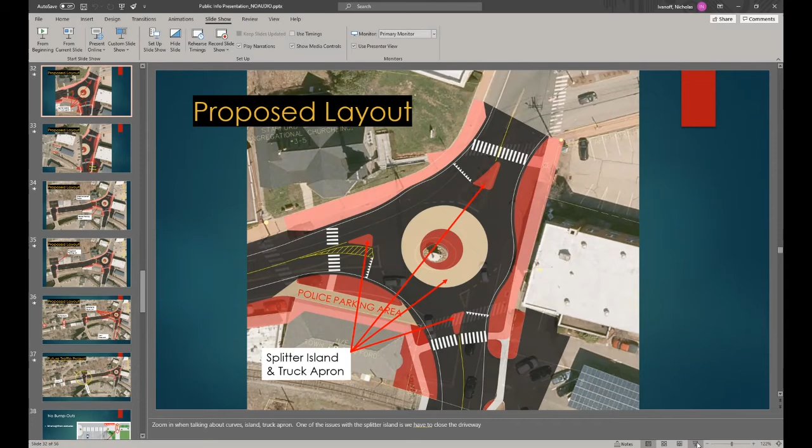In the immediate vicinity of the roundabout is something that we need to fix in terms of operations, by providing the curvature, like Nick mentioned, that was lacking here.

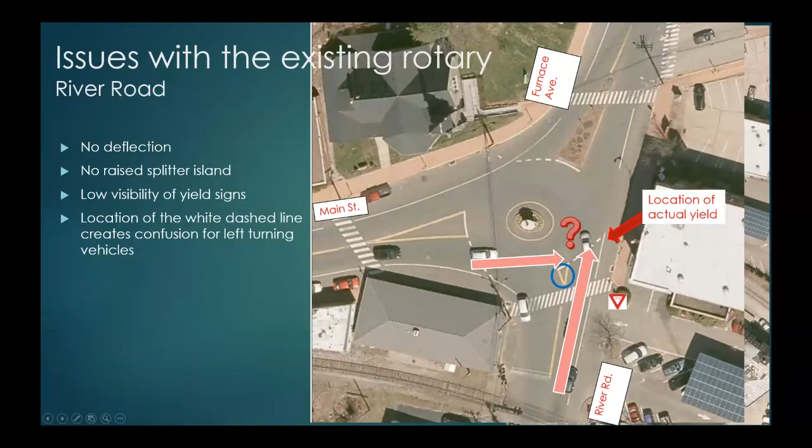The bump outs up Main Street, that was something we looked at when we were reviewing our area. We do a bicycle and pedestrian needs assessment when we look at a project, and that came up as part of that review. It said we have lots of pedestrian traffic on Main Street. There has been a pedestrian who was hit crossing Main Street. How can we fix that? We can fix it pretty simply, for pretty much a low cost and without too much impact, by providing these bump outs. So that was something we were proposing. Doesn't mean it's something we have to do if there's a lot of opposition towards that.

Hey Mike, just to add to what you said, at this location where the on-street parking is, our reasons for including that geometry here was more than just protecting the roof of the police building. There's really a lot of near misses out here. Our coordination with the town and local police has indicated there's a lot of honking that goes on, likely because somebody coming from River Road is proceeding straight, maybe missing the yield sign, and shoots straight through the intersection. The person coming from Main Street who actually has the right of way has to slam on their brakes and give way to this person going straight through. That does lead to the potential for somebody to get rear-ended, or there's also the potential for a T-bone crash to occur here.

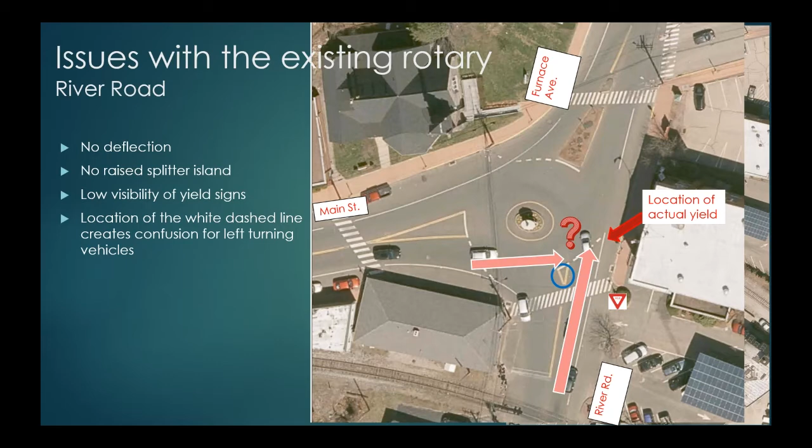There was another question from email about the speed limit not being mentioned in the design details of the project. Our members can attest that traffic generally does not abide by the current 25-mile-an-hour speed limit on Main Street. What speed limit is posted for the roundabout proper and for the entry and exit roadways?

So I can say that we're not changing any of the speed limits out here. Nick, I believe we don't post signs - and Nick and Mike Chachakis, feel free to chime in - but I don't believe we're going to be posting any signs for a different speed limit within the roundabout. Is that correct? I don't mean to speak for Mike, but I think that's true. We generally don't put up a sign to say specifically what the speed limit is in the middle of the intersection. The speed limit on the approach legs itself will remain unchanged.

And as I recall, if there's a request for the speed limit to be changed on a particular road, that's something the town would have to request through our traffic division. And the fastest path, Nick, for the roundabout was like 22, 23 miles per hour, right?

Right. So something we do with our projects, when we're trying to figure out what geometry a roundabout needs, we really look at how a driver could pass through the intersection taking the shortest, easiest path. We call that our fastest path analysis. What we found with the geometry we put in here is it's really going to be less than 25 miles per hour. The curbs we're putting in and the deflection we're generating do a good job slowing down drivers, and it doesn't allow them to cheat the way a simple pavement marking would. Yeah, absolutely right. Thanks, Nick.

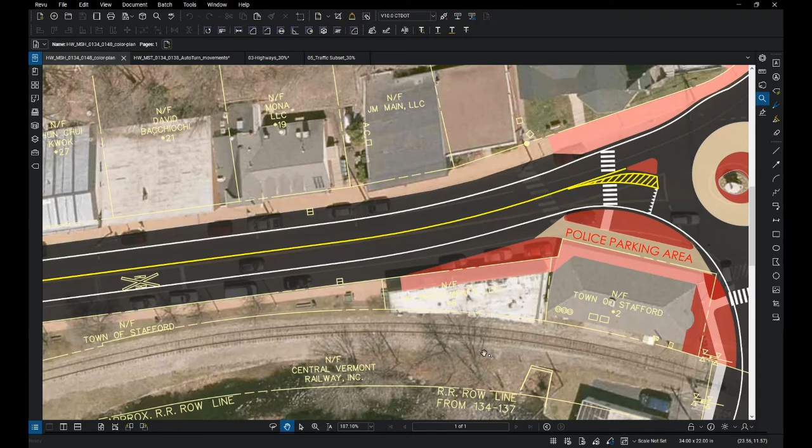There's a question from email: will a hearse be able to park by the Congregational Church during a funeral service? Like I mentioned earlier, we're going to have to coordinate with the church to see exactly what their needs and operational needs are, and see how we can best accommodate moving forward. So probably tomorrow morning to sometime early next week, we'll be trying to reach out to somebody at the Congregational Church to see how they function and how we can best serve them.

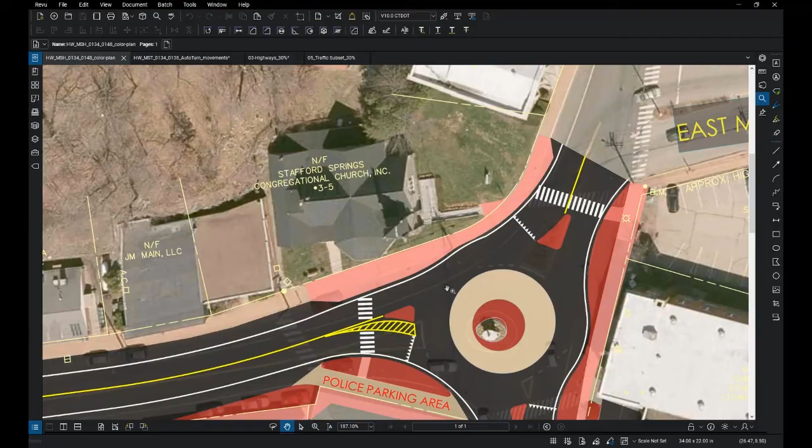So I just wanted to take a moment to remind everybody, in case somebody came in late and didn't get a chance to see the presentation or see how to communicate with us, as many of you have - we really appreciate all those comments and questions. You can visit the project webpage at portal.ct.gov/DOT, Stafford, 134-148. On that website, you'll be able to find the project email.

You'll also be able to - I don't think the project voicemail will be open for 2 weeks, but does anybody know? Mez, do you know if the project voicemail is open for 2 weeks? I'm not sure.

So at the very least, the email will be open for 2 weeks for you to submit comments. That email address is dotproject134-148@ct.gov. Mike, I'm sorry, yeah, now I just remembered - yes, you can leave a voicemail up to 2 weeks until the due date. Just make sure to include the project number, because we have other projects, so sometimes it gets confusing what question goes to what project.

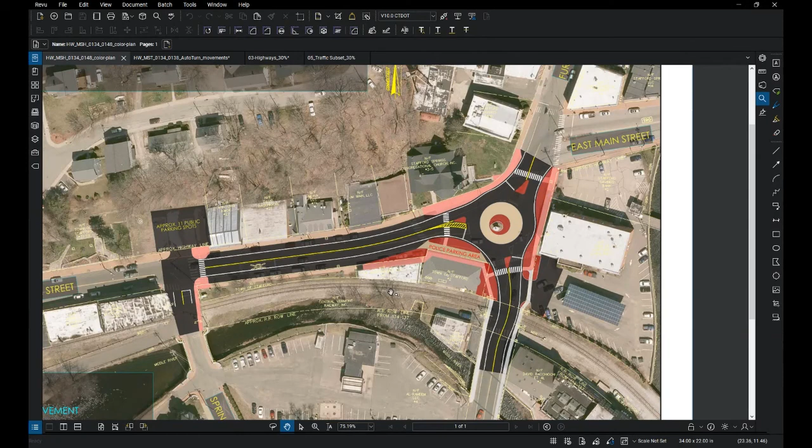In this particular project, like Steve mentioned, there's really not much in line for existing utility relocations that the state needs to do in order to accommodate the project. But there are some minor ones, and we are continuing to coordinate with the town, and would expect if they have anything, they would bring them up to us.

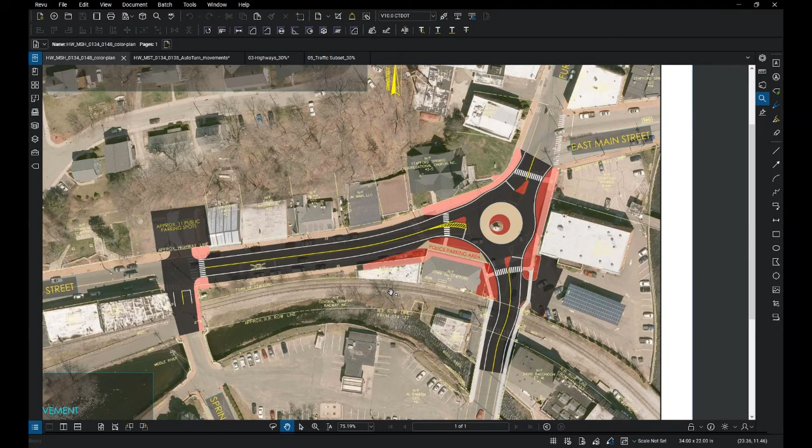One of the questions that just came in, somebody was asking if we could reach out to them personally. They provided their contact information so we can answer any questions a specific business owner has about a business on Main Street, and how our project would affect them personally. I'd encourage any of you with a business or a specific concern about your own property to provide your information in an email or in the chat. We see the chat before it gets published, so we can chat with you personally, or you can leave a voicemail to any of us, and we will get back to you and hold a personal meeting with you out in the field if that's the best course of action.

If we're not comfortable doing it in the field, we can do it virtually in a setting like this where we can share screens. We use MS Teams, but we can also do Zoom if that's something you're more comfortable with. But in order for us to do that, please reach out if you have specific concerns. I know some other property owners are doing that, reaching out to the design team through email, giving phone numbers and ways to contact you. We're more than happy to do that if that's something you guys are interested in.